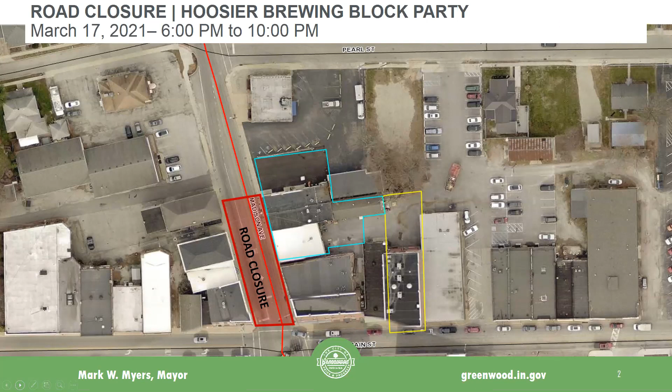We'll move on to Harvey Simonis. Am I saying that correctly? Yes, sir. Okay, Ms. Simonis, step forward, 1790 Woodfield Drive.

We've got a drainage issue. Yes, sir. Good evening, gentlemen. Thank you for this time. I don't have an electronic presentation, so if I could, I'd like to give you all some packages to look at. If I may approach you all. Certainly.

We do have these copies of your encroachment request. Okay, I made some changes to the letter that was attached to that. I did that. Got one here for you two gentlemen, just one first. Okay, one, two.

Tell us what you want to do. Okay, we bought this property in 2014, just a little bit of background. We're the second owners of this property. That drainage swale ditch in the back, I have no problems with water building up after we have a rainstorm.

To the south of me is a cement pipe that takes over. Sometimes it fills up with water, and eventually it drains out. Also, at some point in time, someone has put sod down on this drainage area in this easement, prior to us owning it. It's created what I call high and low spots, where I have standing water for weeks after a rain. I'm trying to correct that standing water problem. I proposed to put in a French drain.

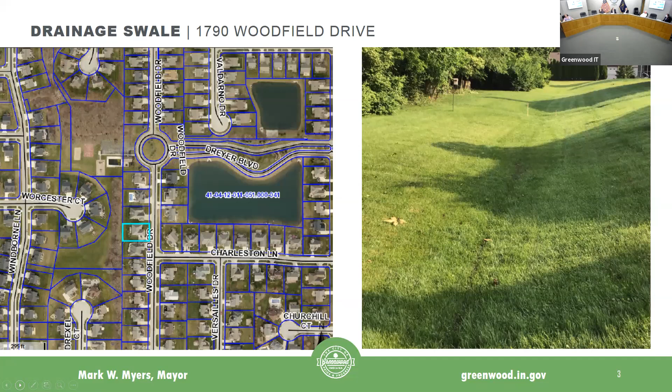If I may suggest, the resolution would be to put in a larger cement pipe on my property and on the property immediately to my north. But that's an expense I cannot afford. That may very well be, and I'm not sure I have enough information to leave my fellow board members here to discuss that. Right, understand.

By consensus, we refer this to staff. Mrs. Simonis, if you're in touch with Jonathan, have him coordinate getting all the various players involved to get it resolved. It may not be in two weeks or by the next meeting, it may be a bigger issue than we're ready to handle in a short amount of time. This didn't occur overnight, and it's not going to be resolved overnight. We appreciate you bringing it forward to us and your candor in trying to get this fixed.

You want this back? Why don't we give you these back, unless they want to keep them for others to look at and research. You may distribute them however necessary, is that okay? They can keep them because I have one copy also. Okay, we'll pass those down to Dan. Thank you very much, appreciate your time. Thank you for your time, and I wish you the best. Thank you.

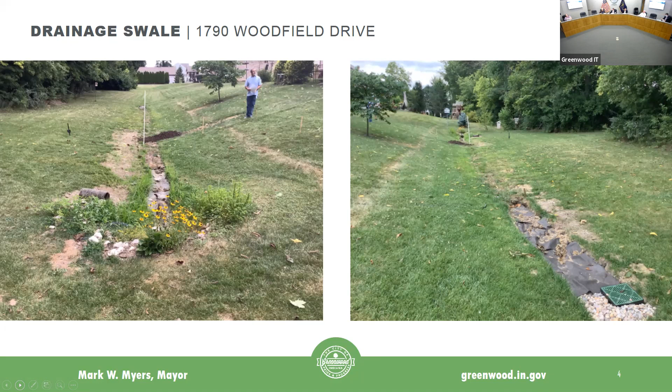We are here for the acceptance of the improvements in Section 4A, which included the surface asphalt and monumentation in the 13 lots in that section, and acceptance of the maintenance bonds and return of the performance bonds.

We've got a memo from Paul County with a recommended unconditional motion. Is there anything you need to add to that, Andy? No, that's correct, that would be the approved request. Second. Further discussion? Seeing none, all in favor say aye. Aye. Motion passes.

Could I ask a question or just present a situation here? These 13 lots, we pulled the first 8 permits on this section when these homes were under foundations, no even vertical lumber had been started yet. We went to pull the last 3 permits, and the way the ordinance reads right now, according to what I've been told, is that we have to surface at 80% of building permits. Well, in my experience, surface coat is what you want to do at the very last, after almost all the construction is done.

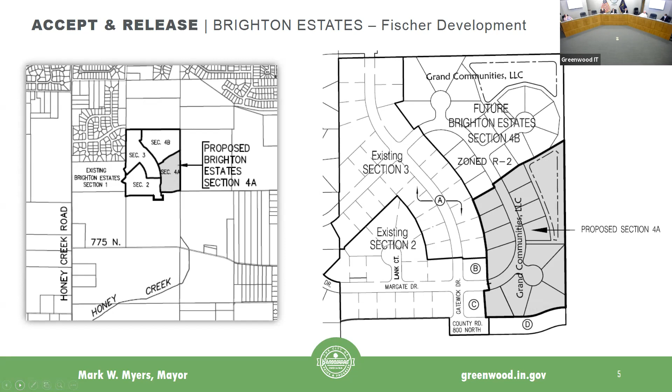Thanks, Ryan Strauser with the health system. Ryan, are you with us virtually? Yep, I am on here virtually right now. So basically, I'm just coming to acknowledge the completion of the improvements we've made as part of the retention area on their project on the north side, and to request a release of the performance guarantees for the project. Daniel, again, we've got a memo from Paul recommending a non-conditional motion to approve.

Is that correct? Correct. I'll move for approval. I'll second that. Further discussion? Seeing none, all in favor say aye. Aye. Motion passed. Thanks, Ryan. Have a good evening. Thanks, you too.

Anyone from the audience wish to address us? Hearing from none, we'll move on to Mr. Hoskins, the IDEM compliance plan status update.

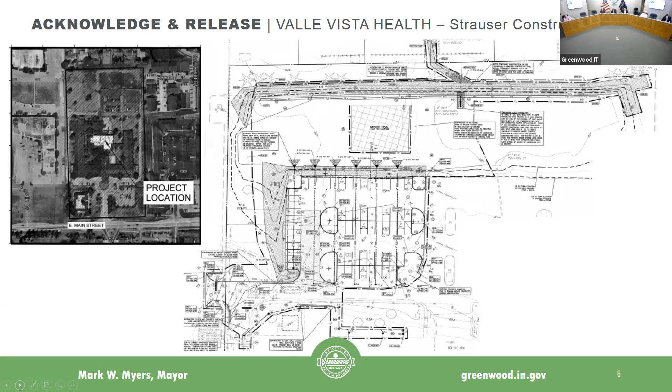All's well with IDEM, my current operating reports. Always glad to hear anything from your office. Nothing today. Okay, Mr. Johnston.

Move to approve. Further discussion? Seeing none, all in favor say aye. Aye. Motion passes unanimously.

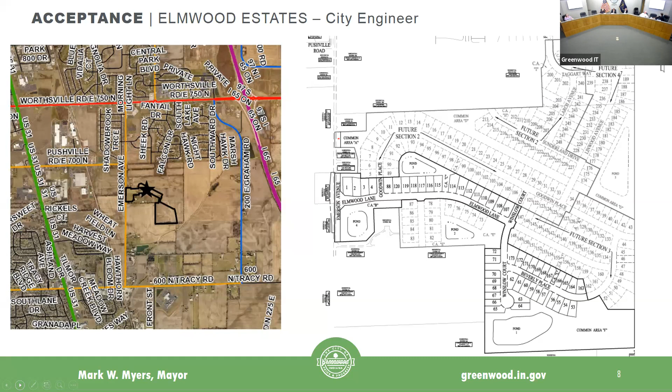I'll move for approval. I'll second that. Further discussion? Seeing none, all in favor say aye. Aye. Motion passed.

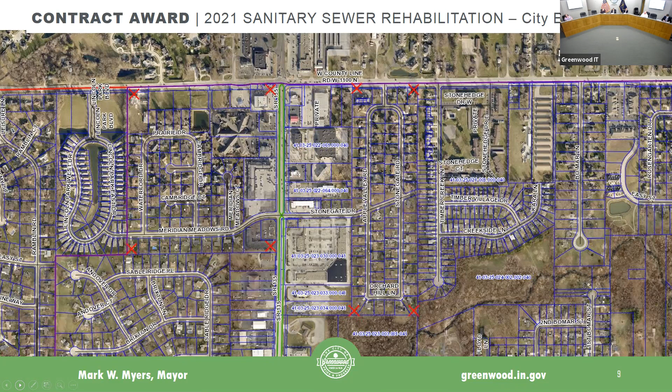I'll move for approval. Second. Further discussion? Seeing none, all in favor say aye. Aye. Motion passed. Next, also our 2021 community crossings matching grant.

This is our thin overlay project. Had the same bid opening date. Legal department reviewed bids and found that Milestone Contractor was also the lowest responsible bidder for this project. So that's our motion for the contract: bid to Milestone, and authorize the mayor and deputy mayor to sign on the board's behalf, with the finance department identifying the final funding source. This covers Sheek Road and Averitt Road. So Sheek Road essentially from just south of the S curves to not quite, I guess, halfway between South 18 and Portsmouth.

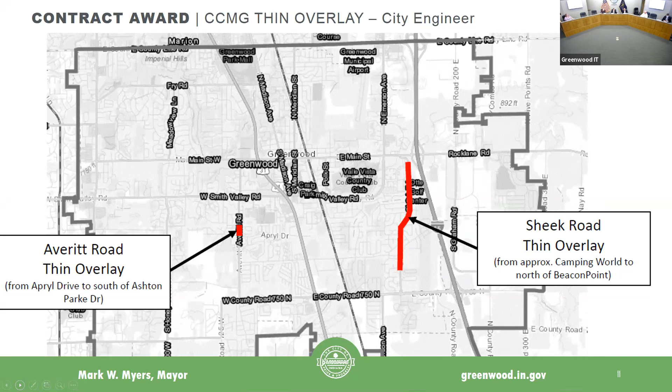I would move that we award the bid to Milestone. Second. Further discussion? Seeing none, all in favor say aye. Aye. Motion passed.

The next 2021 community crossings item is the third of our community crossing projects for this round of funding. This is our HMA Rejuvenator project. Bid opened last Thursday, one bid was received. Tech was the apparently low responsive and responsible bidder. So that's our motion to award the contract to Tech and to authorize the mayor and deputy mayor to sign on the board's behalf.

Finance department finalizing. We have a reasonable estimate. The bid price is below the estimate. That's correct, we estimated about $50,000 for that.

This is the one we talked about, right? Yes, you know where I'm coming from with my comment. I don't agree with the rejuvenation process. I don't think that road is appropriate to do this on. I'll vote no on this project. If you've got time to look into this a little further since our last meeting, in terms of the success of this technology, I guess. We've not had any success in the city using anything remotely like this that I'm aware of.

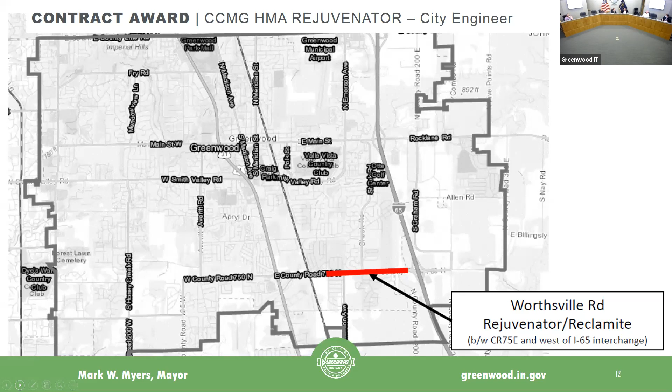Have any specific questions? Auditors are here to answer questions, please. Is there a motion? I move it be approved. I'll second that. Further discussion? Seeing none, all in favor say aye. Aye. Thank you, Matt.

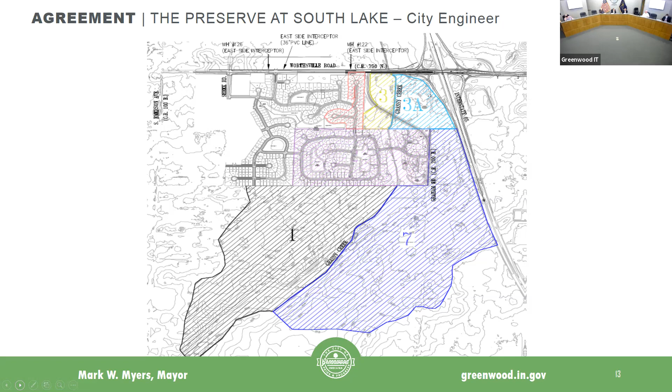And my last item is more of an update. Two weeks ago you approved a noise ordinance waiver for Worthsville Road 3, Bridge 4. They had to postpone some of those dates, so the first phase will actually go against Thursday the 19th. The second phase will occur later. I think we gave you the flexibility, right? Yes. Thank you. Okay, Daniel, I guess that's all I have.

Thank you, Greg, anything for you? I'll move to approval of the claims as submitted. Further discussion? Seeing none, all in favor say aye. Aye. Motion passes. We will stand adjourned at 6:27 PM. Thank you all.